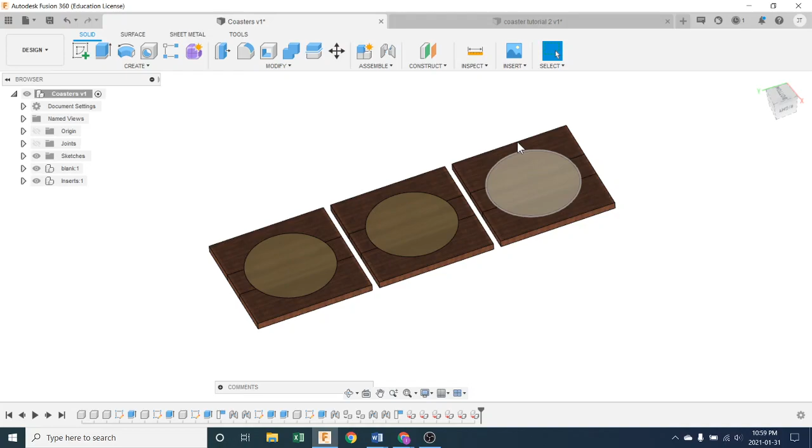And it's important in Fusion, if you have more than one piece or component, that we set that up right from the outset. So I should have set up a component, and then I would activate that component, and then I would start drawing. And then all of the things I'm drawing and creating would be associated with that component. And when you draw, we made sketches, and when we extruded into 3D, they became bodies. So if I go up to the top level and activate that, there's something down here known as the timeline. It shows you every step that you've made along the way.

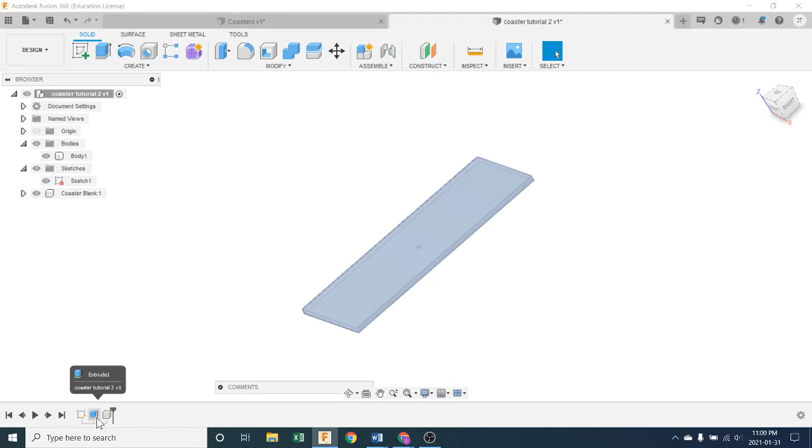So the first thing we did was we drew a sketch. That sketch is invisible right now because you can make things visible and invisible by clicking the eyeball. And now you can see the sketch right there. And then the next thing that happens is we extruded a body, which is right there. I can turn the body off and I can see the sketch. I can turn the sketch off. Turn the sketch back on, the body back on. So we made a sketch, we made an extrusion for a body, and now I've made a component.

Well, I would like these sketches and bodies that are associated with coaster blank component to be underneath coaster blank component, and they're currently not. And you can't just drag them and put them under there either. Well, usually you can't. Oh, it was smart. Okay, I'm going to hit Control Z and bring it back. So normally if I tried to drag this sketch underneath coaster blank, it wouldn't let me because the component was created after the sketch.

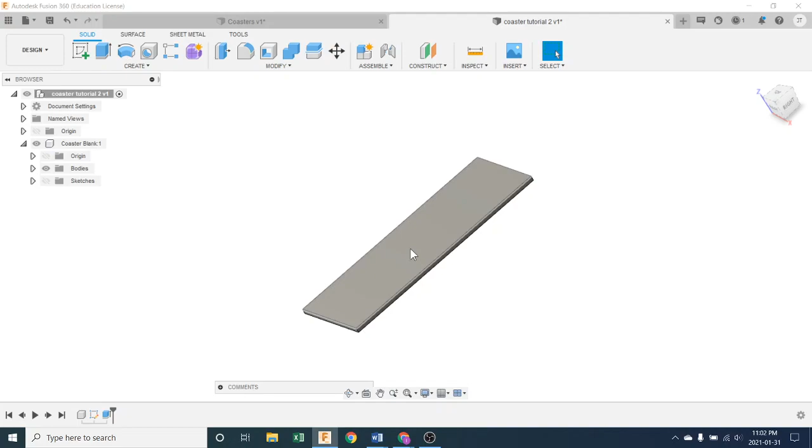So what you can do is drag this component back in time and have it created in the timeline first, before the sketch. And then you take the sketch and drag it underneath coaster blank and let go. And look, underneath coaster blank, bodies, sketches, both to do with coaster. And this allows me to switch off the little eyeball and turn that on. And that's going to be helpful later. And this sketch, I don't like looking at it, so we're just going to turn it off. Normally they're off by default. But anyway, that was a pretty cool move to fix it.

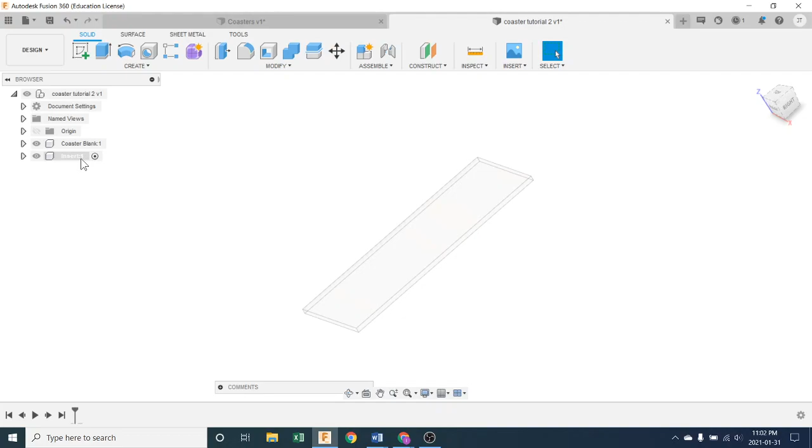Now, a better move would be to do it at the outset, and here's our next one: new component, we're going to make an insert because we're going to need it later. Insert. Push OK. Then when I go to draw the insert, I'll activate insert and I'll draw it. And then all the sketches and bodies will remain with insert. Okay, so we're going back to coaster blank right now. So let's activate that, and we've got to do some work on this.

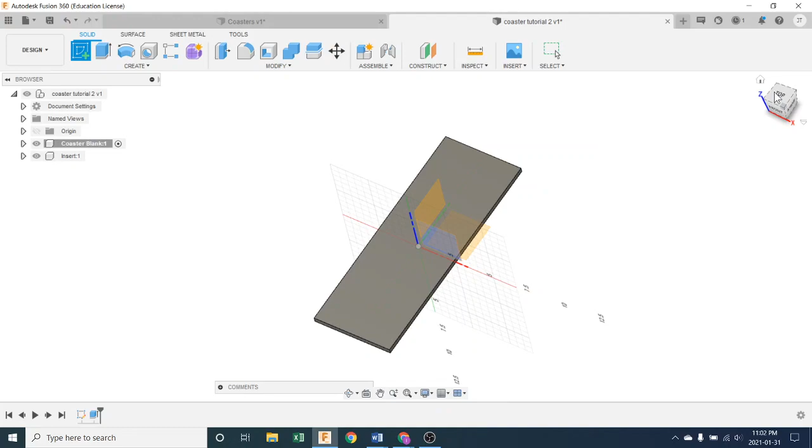So we're going to create a sketch. This time, do not choose the origin. Don't. If you've done it already, Control Z. Now what you're going to choose is the coaster blank, the top surface, right? That's this one lining up. See, it says top. So click on it. Now, we're going to draw a line. You can do that by going under Create, grabbing Line, or you can push L on your keyboard. It's a shortcut or a hotkey.

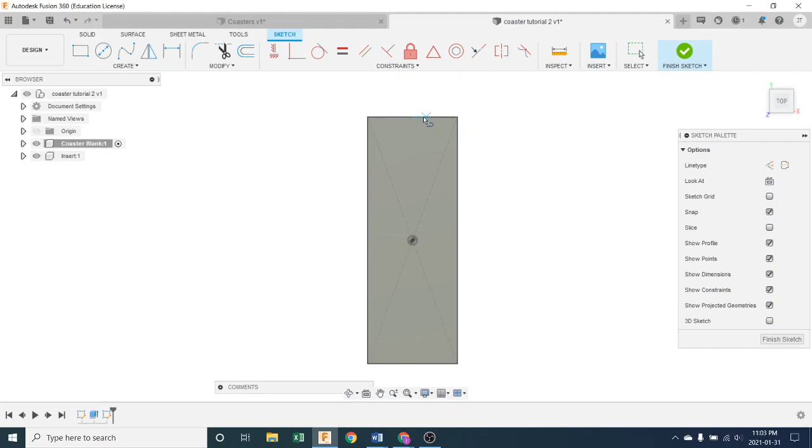Now, hover over the edge. See how they get an X? That X tells me that I'm seeing the edge or I'm indexing it, and when I go to the middle, it gives me an indicator that I found the middle, and that's that triangle. Click it. And now I'm going to find the middle of this edge. Triangle, click it. Hit Escape to stop drawing lines. Now, this line divides this into 2 halves because it's a hard and fast line. You see there and there?

Click on the line and push X on your keyboard. Now look, it's not divided in half. This is what we call a construction line. See it over here under my sketch palette? If your sketch palette's collapsed, just hit that arrow and bring it out. This construction line is useful to me, but it's not part of my actual structure. It's just there to help me build, so I'm going to put that there.

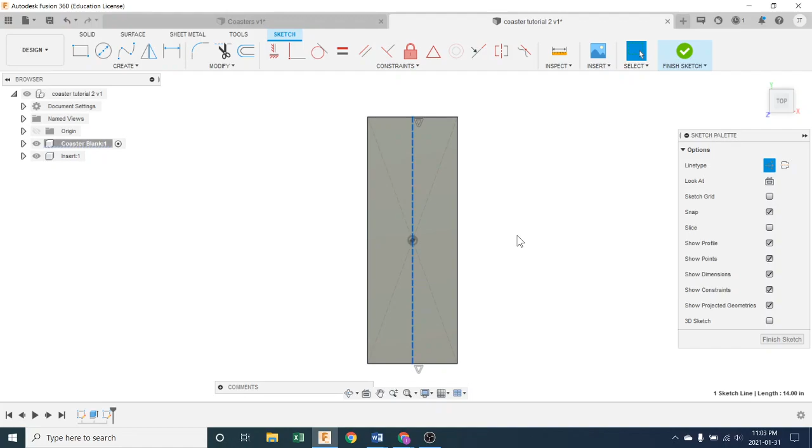So let's draw a rectangle. Create a rectangle, center point, and put it right here on this origin. Make sure it indexes the origin. It goes snap, boom. And then we'll go 4, tab 4, just like we did before.

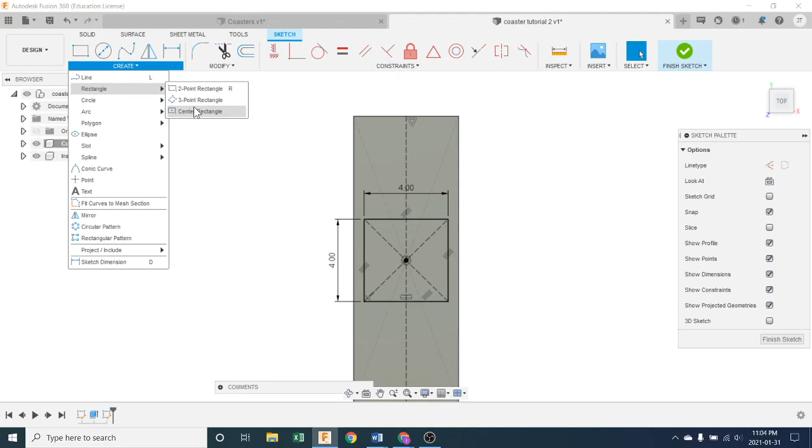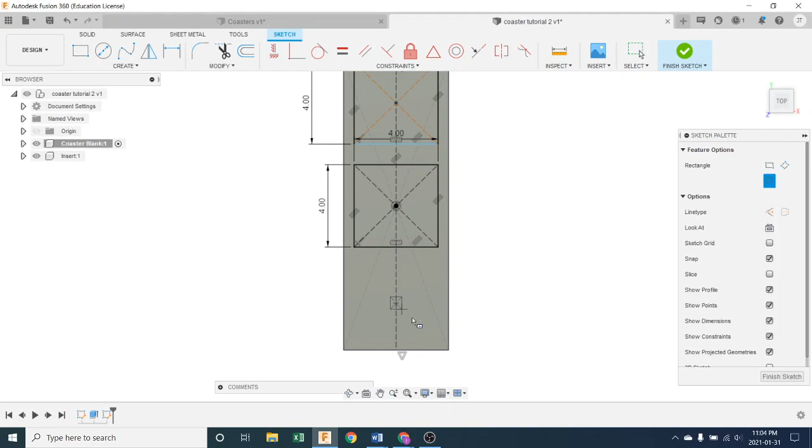Okay, so now we're going to draw another rectangle, a center rectangle somewhere up here, and it's going to be 4, tab 4, enter. And now we need one more rectangle down here. If you want to just repeat the last command, you hold your right mouse button and stroke upwards, and that invokes the last command. There we go, and 4, tab 4, enter.

Okay, so now what we're going to do is we're going to space these so there's a 1/4 inch of space between them, so I'm going to do some dimensioning. You hit D on your keyboard and go center to center, click out there. Now you have to do a little thinking: the coaster would be 2 inches on the top part here, and then another 2 inches, and then the 1/4, so I should need 4.25, enter.

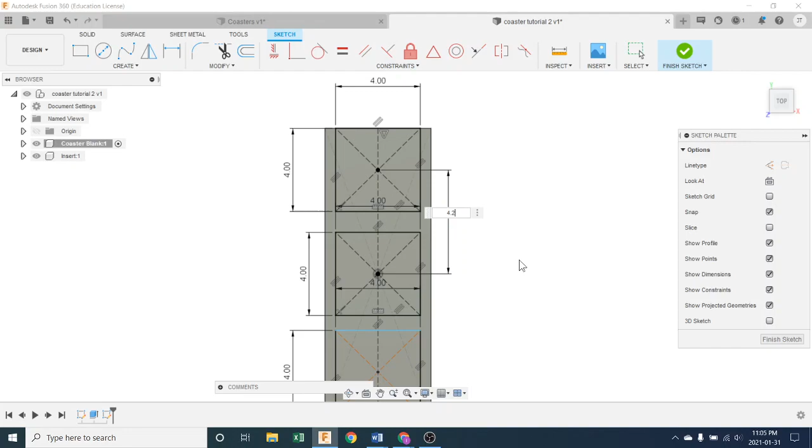And that brings that down. The reason this one moved and this one did not is this one was locked to the origin when we put it there, it had a constraint. So now let's put a dimension here and a dimension to there and pull out, and we'll make this 4.25, enter.

There we go. We're going to be using a 1/4 inch cutter to cut this out. I'm still dimensioning, I know that because my mouse has those little measuring lines on it, so hit escape. We're going to be running a 1/4 inch cutter through here, so that's perfect. It'll just run through and cut that out, and both will be cut out with one pass.

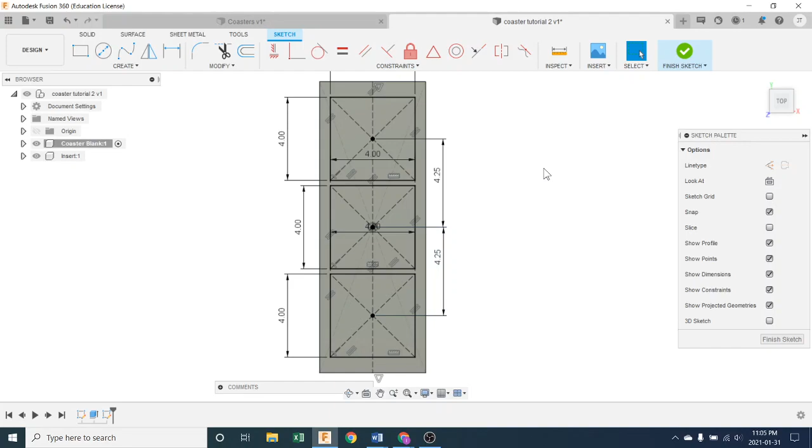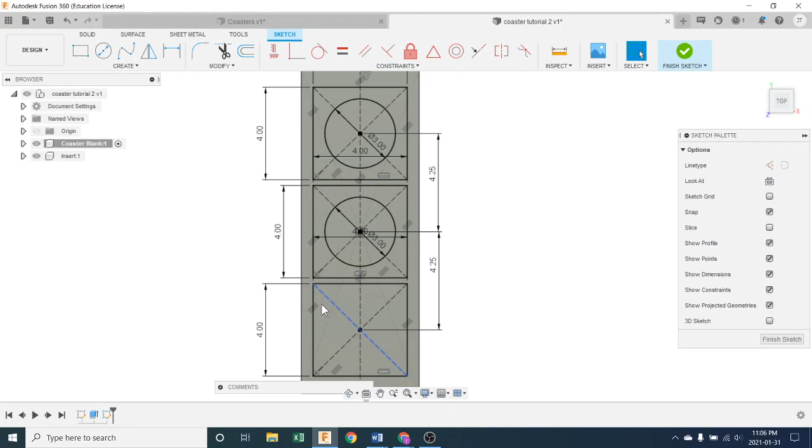All right, now next step, we need to put some circles in this thing. So head up to this center diameter circle, or hit C on your keyboard like I just did. Pick the middle of this and pull out for 3 inches, 3, enter. Now we'll pick the middle of this one, C on the keyboard, pull out 3 inches, just type in 3. And C one more time from the center, type a 3, enter. Okay, so there we go, we got these things all dialed up.

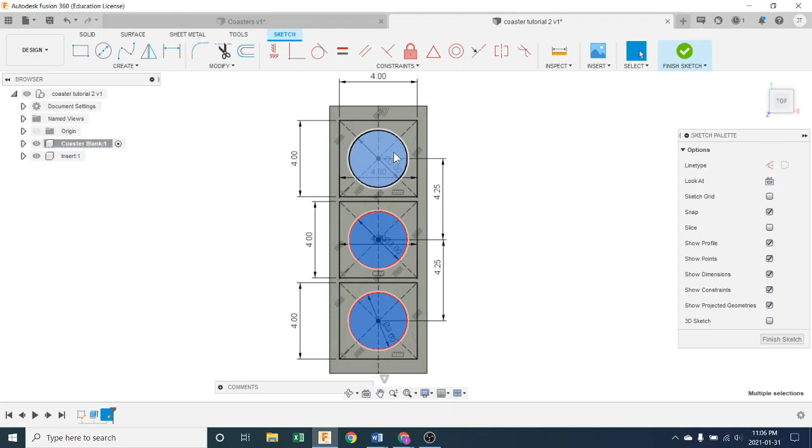Next thing we're going to do is put these pockets in. So I'm going to click that, hold shift, click another, hold shift, and click another. We're now going to push E on the keyboard, and we're going to extrude these downwards. But oh look, you can cut them all the way through when I pull down, see it's cutting over here. This is my extrude menu, but I don't want to go all that far.

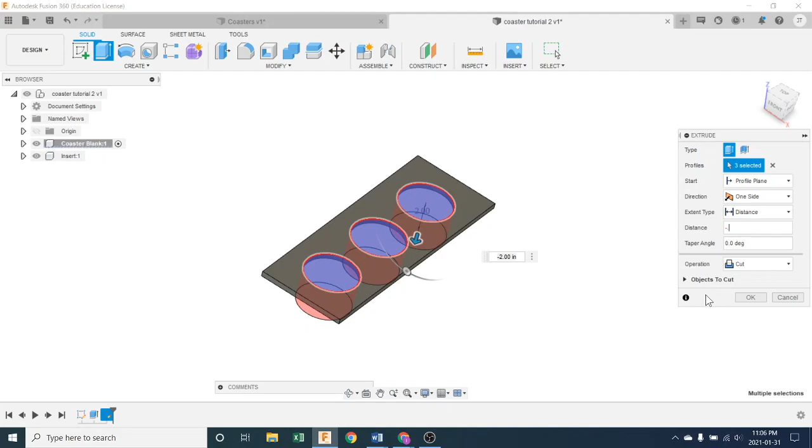I want to go the thickness of the plywood I'm going to insert, so it is -0.125, or 1/8 of an inch. Okay, well there they are. Now I'd like to cut out those squares that we made, so if I go down to my timeline down here, I can see the last thing, there was my extrusion for these pockets.

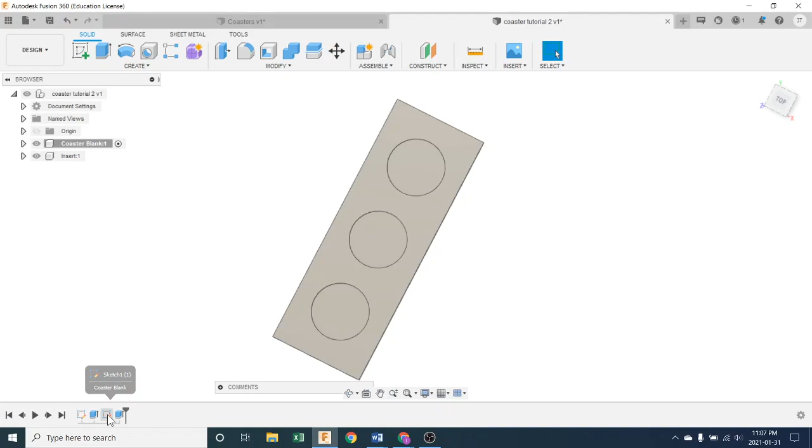But now what I'm going to do is I'm going to go back into this sketch and edit it. So you can double click the sketch, or you can right click and choose edit, and you're right back where you started. So now what you're going to do is hit E on your keyboard. Oh, sorry, cancel, that was the wrong way to do that.

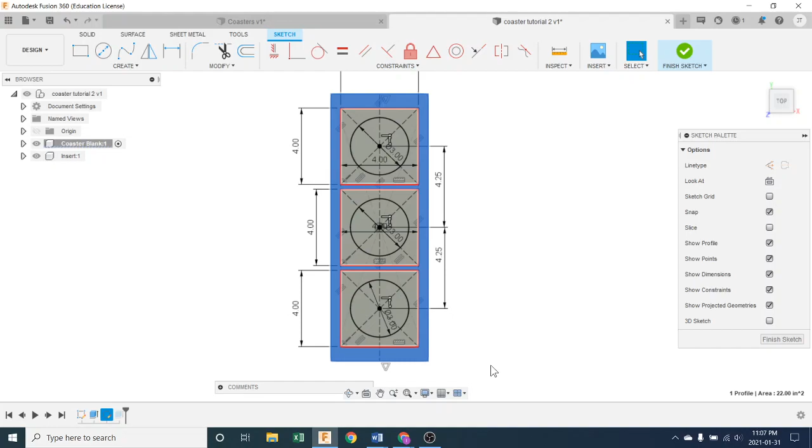What you're going to do is go back in here and pick that, the outside there, and it picks it all. Now hit E on your keyboard and pull this all the way down. But you can do that and it would work, but it's poor CAD form to do that. It would be better if, instead of going a certain distance like 1 inch or 5/16, I'm actually going to pick the object and say cut to the other side of the piece.

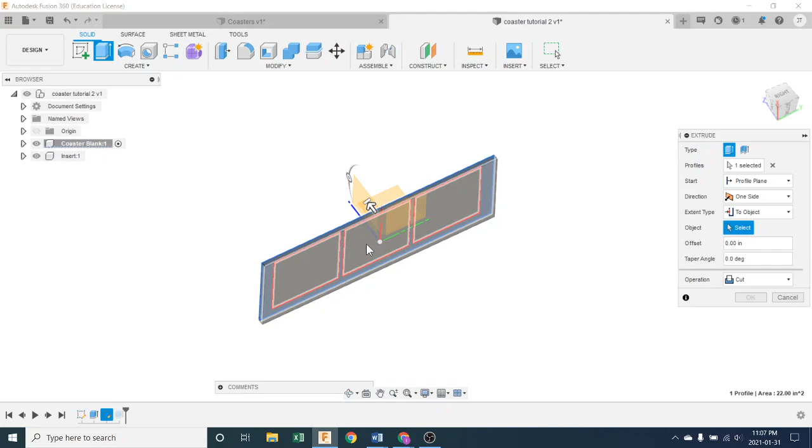So now if I ever change the thickness of the piece later on, because you can do that, you can go back and edit that thickness, if I ever changed it, this cut would always go through to the other side. There we go. So now we've made our 3 individual pieces, and that's the end of this tutorial. In tutorial 3, we'll be making those inserts and then actually assembling the inserts into this. So see you in tutorial 3.